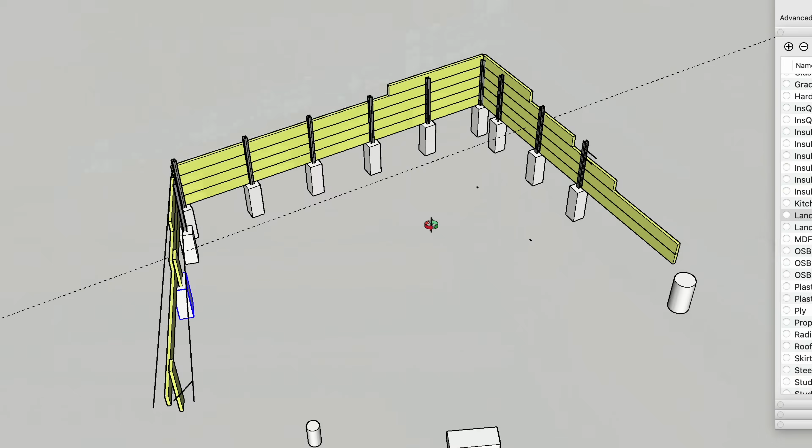What to do with this redundant, sloping, overgrown space at the top of this steep garden? How about a garden room? Or maybe a barbecue area? It's big enough to build a little mini house, or a lovely flat lawn for watching sunsets.

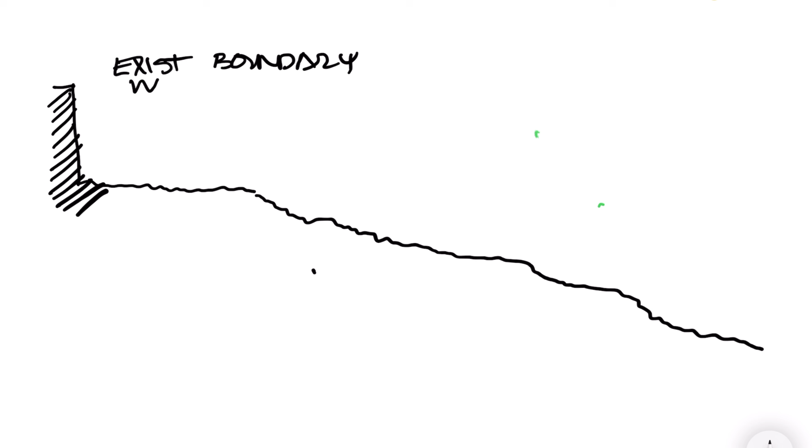Either way, we've got to make it flat somehow, and let's think about a sequence. I need to clear the space, level it, and at the same time prevent all the surrounding land slumping by building some kind of retaining wall.

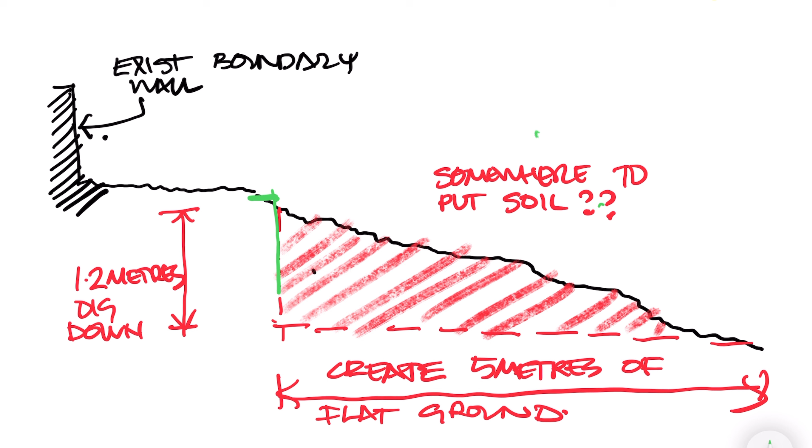It's in such an inaccessible area at the summit of this steeply sloping, overgrown and neglected land. I'm going to have to dig it out all by hand, find a place to relocate all the unwanted soils, and carry all the materials up and down the hill by hand. No mini digger for me. Access is pretty much impossible for anything other than a person.

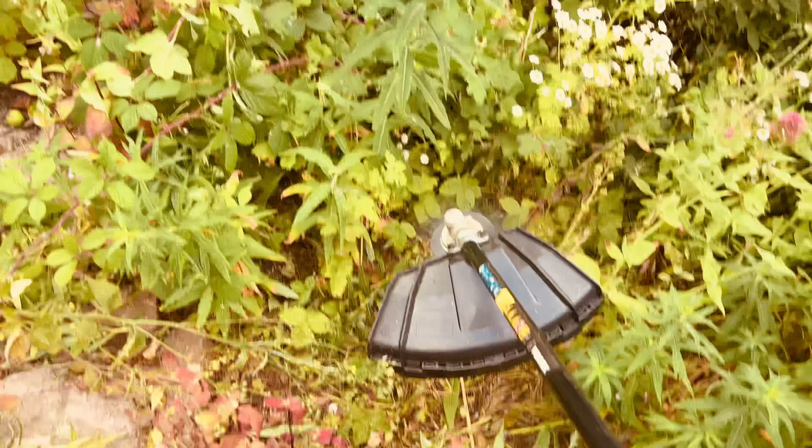For the tools I think I'll need to cut back this overgrown den and get the uglier trees and overgrown weeds away, I'll need to clear out all this bush, using a combination of this petrol rotary brush cutter and this DeWalt hedge trimmer. I'll bag the cuttings and take them for recycling in these big canvas bags, but for the really prickly stuff I'm going to use this incinerator to burn it.

Just talking to my neighbours first to make sure they're cool with that, as well as checking my local council's policy on burning organic waste in your garden.

While cutting down the trees and branches, I'll use this DeWalt mini chainsaw with a large battery, and I'll be sure to have adequate face, ear and foot protection. For my hands, I'll use these chainsaw gloves. They've saved me in the past while using these highly dangerous tools.

I tend to use the smaller battery sizes for things like impact drivers and combo drills to keep them light in my hands, but for circular saws and chainsaws, you'll need the bigger battery.

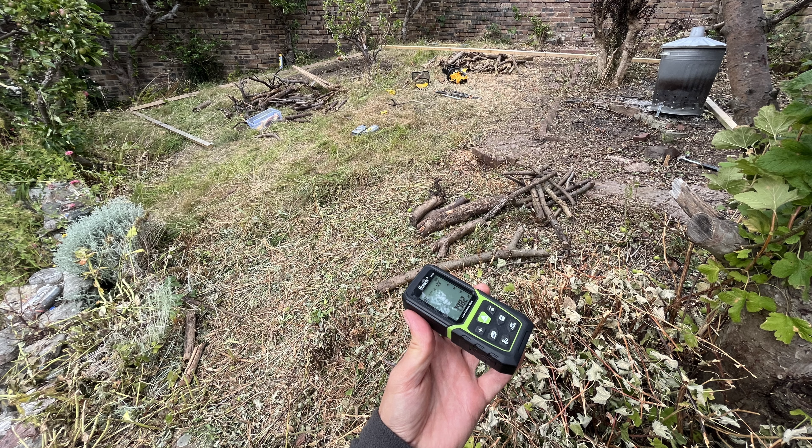Now with the land cleared, it's time to set out where I want my dig to start, which in turn will set out the position of my new retaining wall. I'll set out very approximately using these battens, lie them on the floor, and then using a combination of a tape measure, a digital measure and Google Maps, I'll get a bit more detailed a plan.

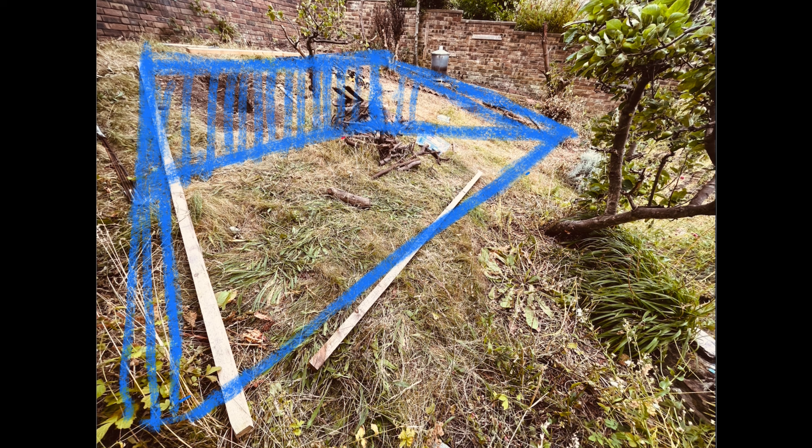I'll spray down the footprint accurately and then get a good night's sleep. I've got a week or two of serious digging ahead of me, and I'm no muscle man. I'm going to be digging down about 1.2 metres from the highest point over this footprint, which is a huge amount of fill to excavate by hand, and I need to plan what to do with all of that soil.

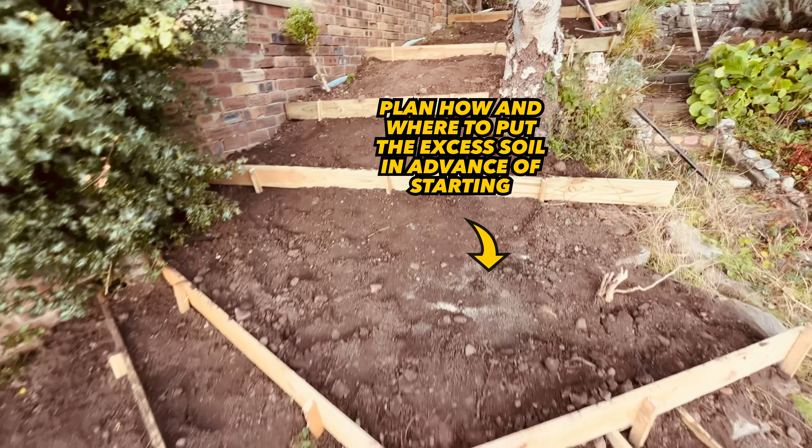I'll be creating a series of terraces with it along both sides, which I'll talk about some other time. I'll be using this simple electric mini tiller, sometimes called a cultivator. You can spend more, but really for the price and the amount of times I'll be using it, this one's fine.

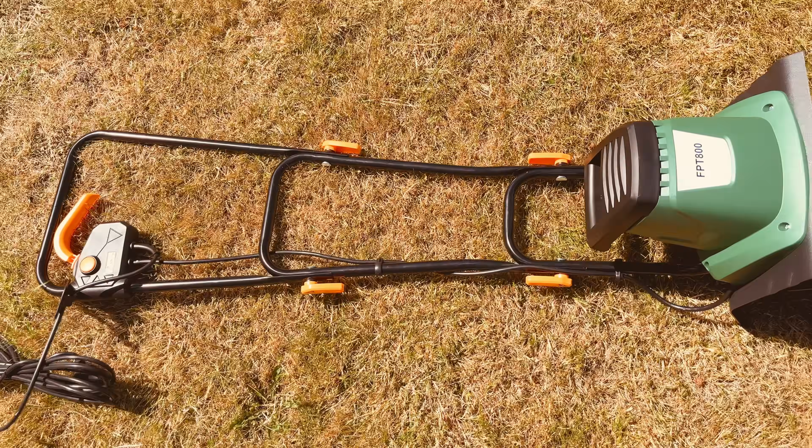And if you're building a garden room or outbuilding where you need a power supply, water or drainage in a trench, it's really good for forming the trench, as its dimensions are the perfect size for that.

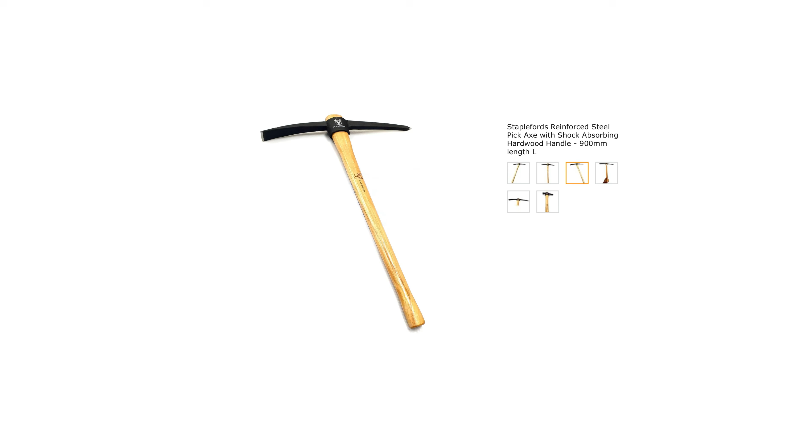I'll use this hand pick, and a bigger shovel with angled edges. I'll need a wheelbarrow - this one with a puncture-proof tyre is what I recommend - and I'll use this grafter shovel for any tree roots or boulders I need to get through or lever out.

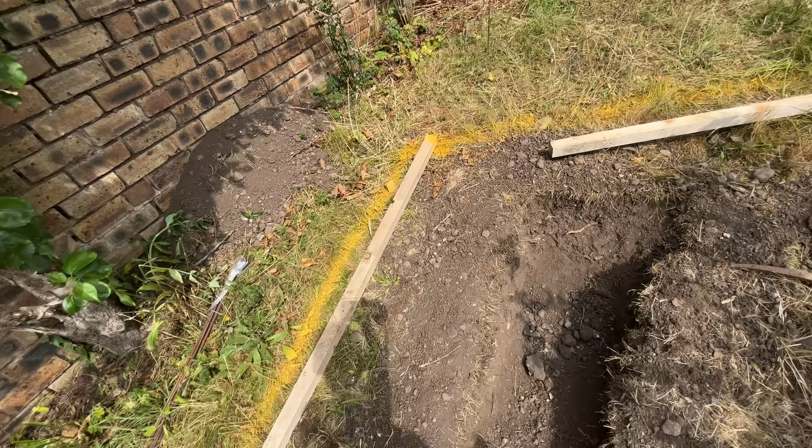Now let's get started. There's not a lot to this that I can tell you that you probably don't know already - it's really just about elbow grease and perseverance. Unfortunately, I lost a lot of the footage due to my lack of intelligence when it comes to filming time lapses, but safe to say it was pretty hard work.

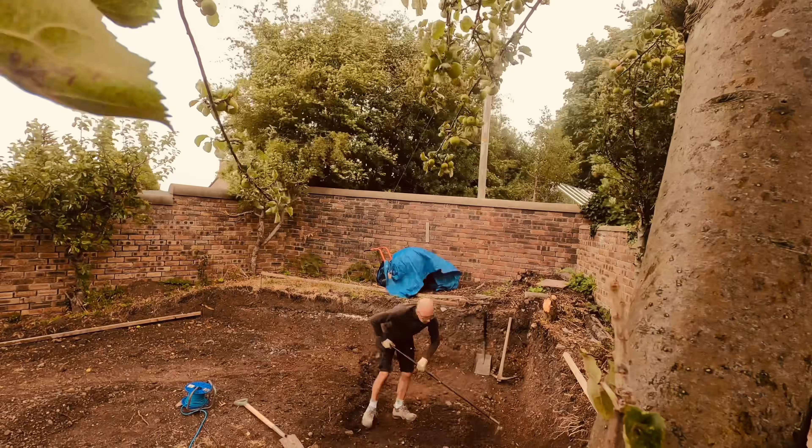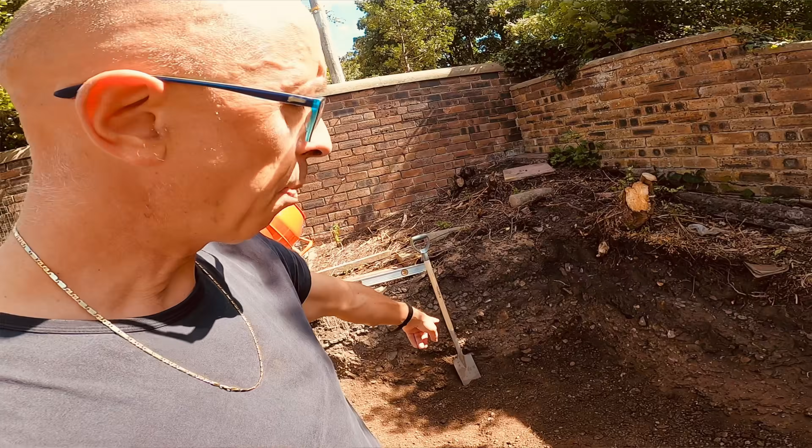8 days in total, because I did this in the middle of a very dry period. The land was totally solid, and it also had boulder clay close to the surface, so I didn't really bother with any shoring. Now where there's any doubt, you should consider some form of temporary propping if you're going as deep as I am, and there's any hint of movement.

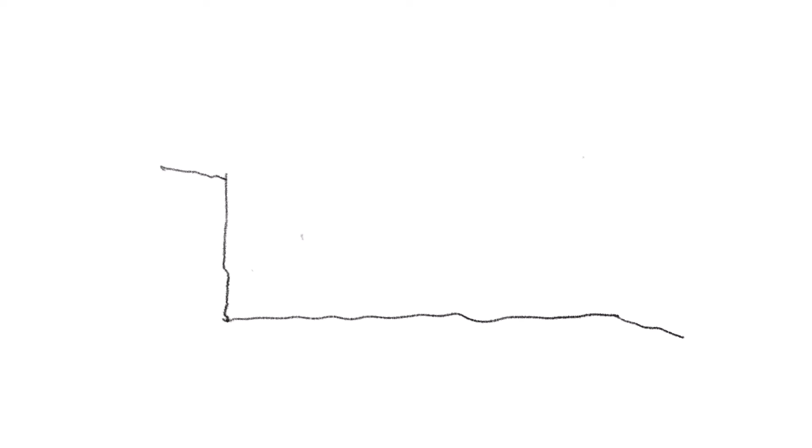I made these temporary shores for this project using 4x2s and OSB. The principle would be similar here, except you would be constructing a triangular shaped shoring with the struts, because you're only supporting one side, with the OSB obviously going against the side you're supporting.

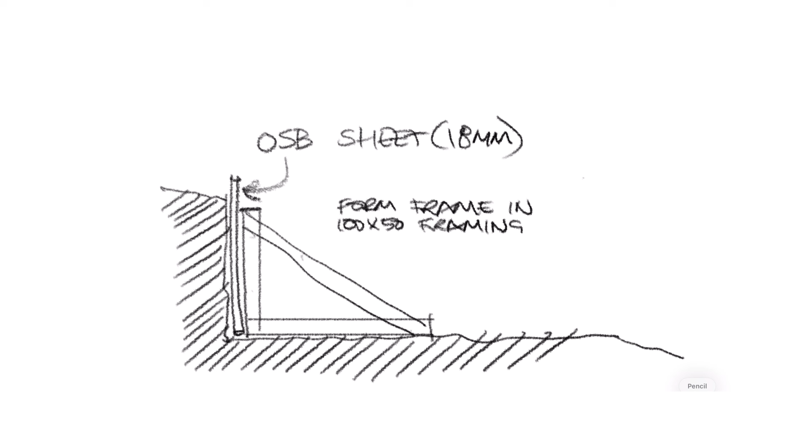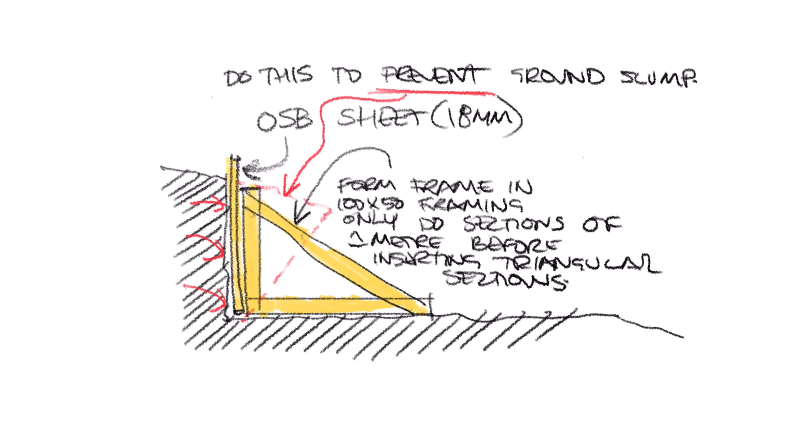I'm going down about 200 millimeters using the tiller to loosen and then the pick to break up. The deeper you get, the harder packed the soil is, so the more you use the pick and less you use the tiller.

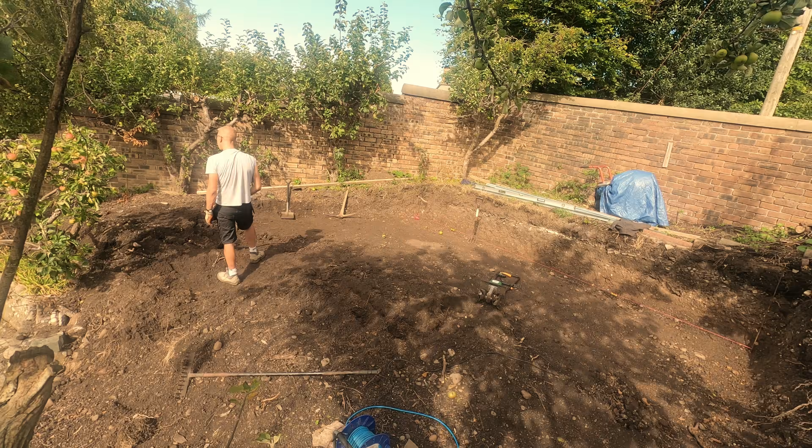To the depth I want, I'll take some basic levels using a piece of 6x2 timber, and then it's time to consider the retaining wall.

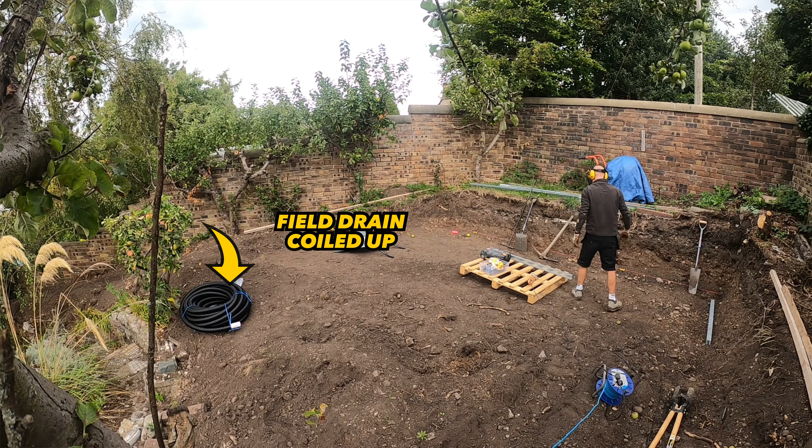Now I've dug the footprint I wanted, plus the thickness of the retaining wall, plus the thickness of the field drain, which I'll run around the upper side to relieve the pressure and divert the groundwater down the hill.

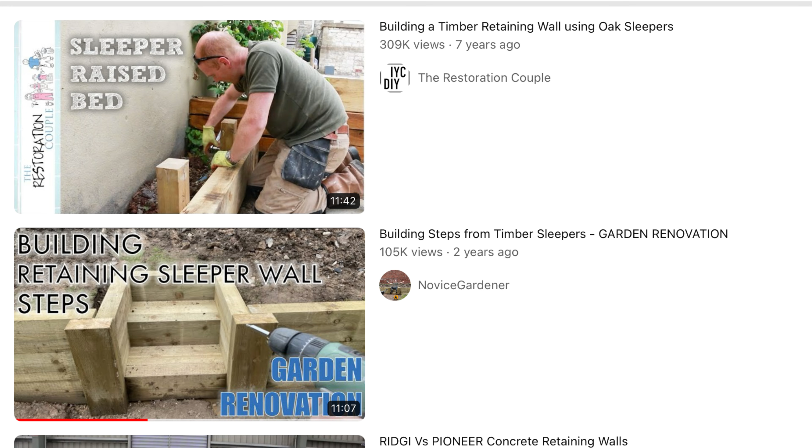Now let's talk about the design of the retaining wall. The trend at the moment seems to be railway sleepers, big chunky 200 by 100 slabs of timber. Aside from the crazy cost and weight of them, my issue is how to get them really firmly bedded into the ground to cope with the lateral thrust of all the ground these sleepers are holding back.

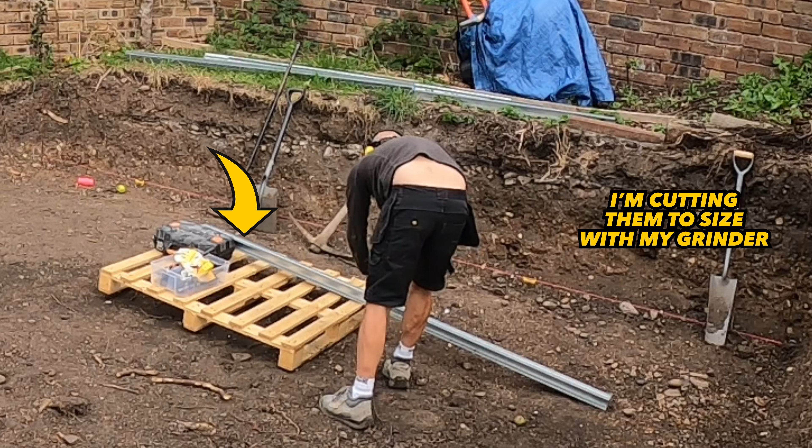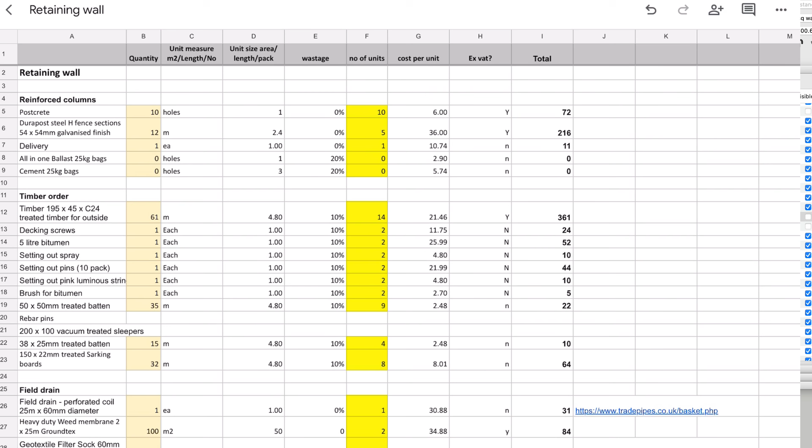My preference is to use these galvanized H sections at 1 meter centers. Super strong if you orientate the web to work at right angles to the direction of the slope. These are from a company I believe called DuraPost, and I'm going to use these to support 45 by 200 millimeter pressure treated C24 graded structural timbers.

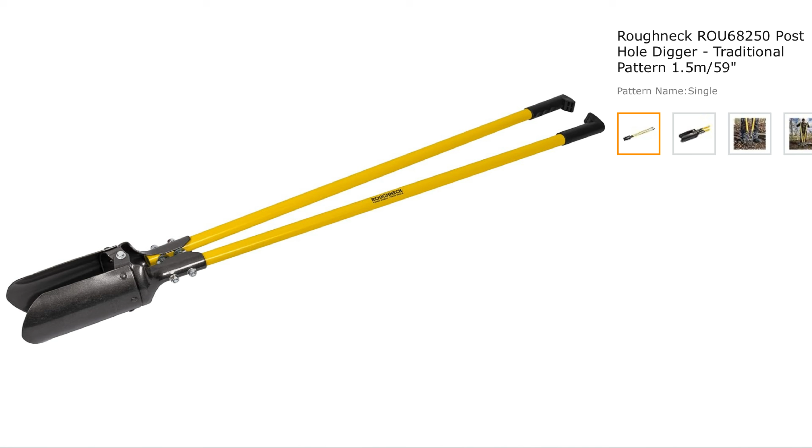I can get these posts set really rigid in concrete pockets by using a post hole digger, digging very deep into the ground and securing the posts rigid by pouring concrete into the hole.

You need to dig down about half of whatever height your post is for the depth of your hole, and that's an absolute minimum to prevent any rotation of the post as the pressure on the timber builds up. So if I'm at 1.2 meters high here, the depth of the post hole would be an absolute minimum of 600 millimeters plus about 50 millimeters cover at the base.

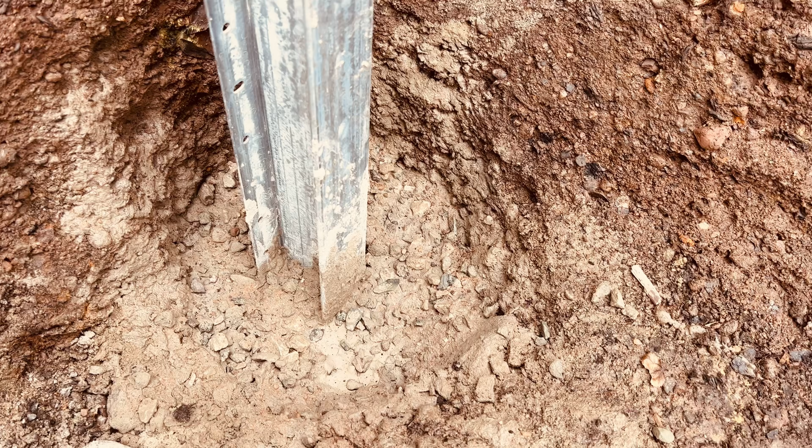For something where I'm not supporting a building, postcrete is fine, and I'll use one bag for each hole. I'll get these bags delivered on a pallet rather than lugging them by hand in the vehicle.

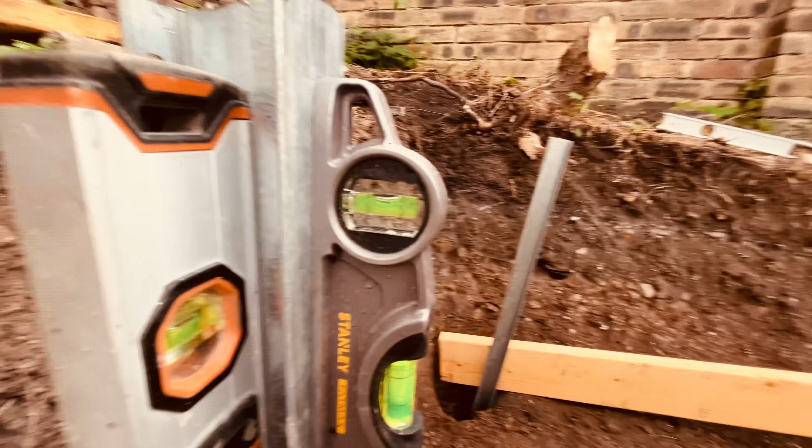Whilst one of us keeps each post as vertical as possible, the other puts in the water first, then the postcrete, damping it down with a piece of timber to get it all mixed in, and then using this little magnetic post level to level it in both directions. This is a cracking little tool and one that you'll use forever, so it's a real worthwhile investment.

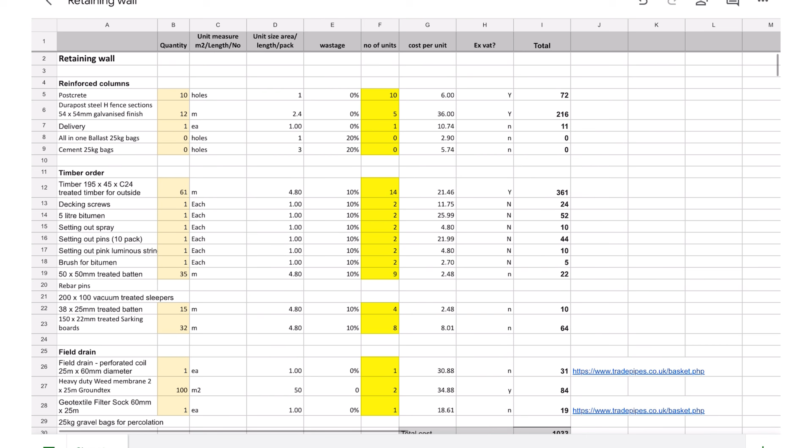Be careful with postcrete, you've just got a few minutes before it begins to set to the point where you can no longer make your adjustments.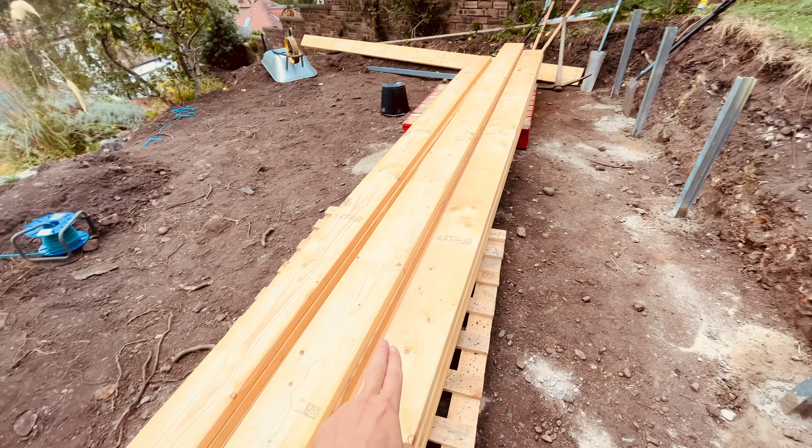I'll leave a day or two for these posts to get solid, and then I'll measure out my C24s, which have been delivered to me in 4.8 meter lengths.

Before I get them in place, and even though these have been factory treated, I'll paint the back sides and the undersides with a few coats of bitumen.

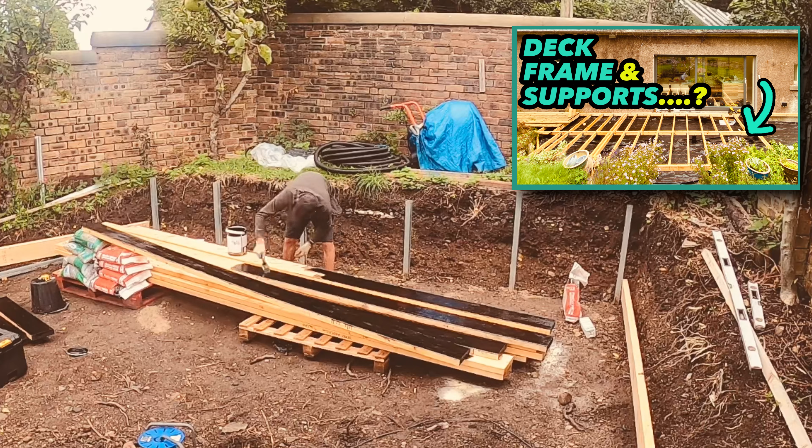This stuff can make indispensable for any and all of your outdoor work. See my video on decking, for example, for how to create a supporting frame that incorporates bitumen and will last you forever.

Then I'll put them in stretcher bond style, making sure the bottom one is spaced off the ground by about 15 millimeters and it's totally level.

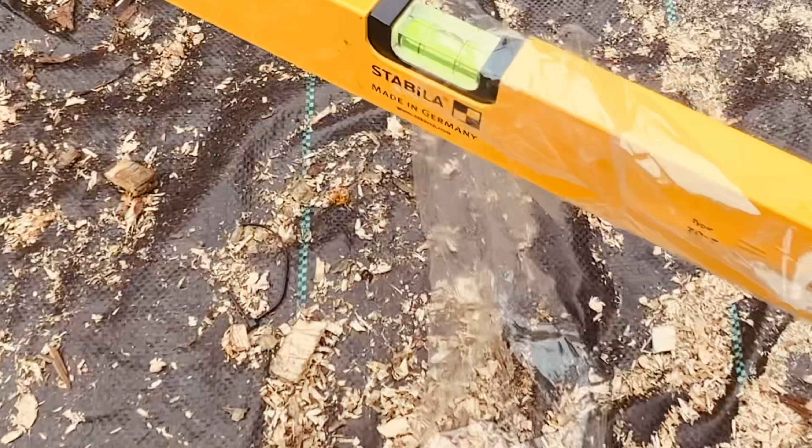I'll use this fantastic level to ensure everything is super level. The great thing about these H posts is that they have fixing holes incorporated, so I can drive decking screws through and into the timber, which will grab the timber and pull it hard up to the posts to make the whole thing work together against the land and do its job as a retaining wall.

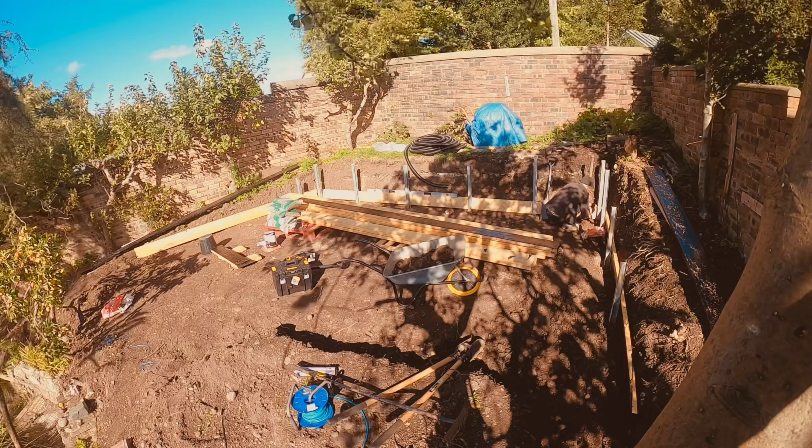I'll go around all three sides, butting up at the corners to maximise the strength, building up at the contours of the retained land.

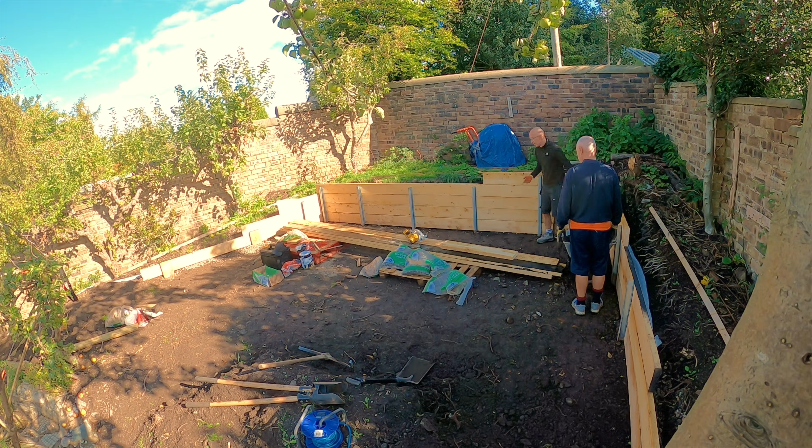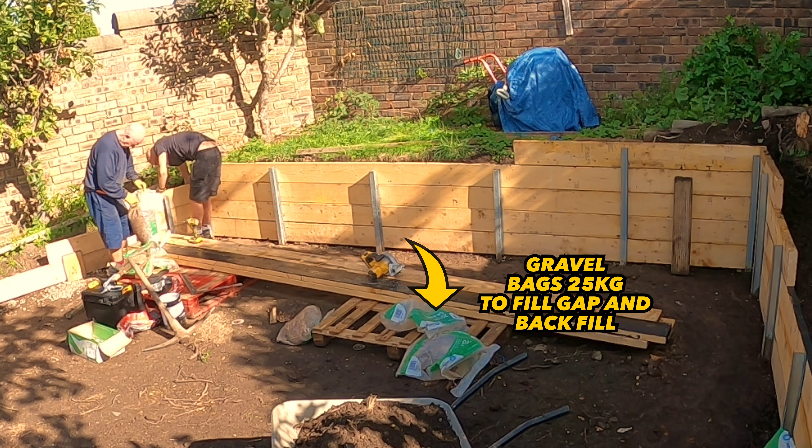Start with a backfill. Here I'm using these 25 kilogram bags of 20 millimeter stones.

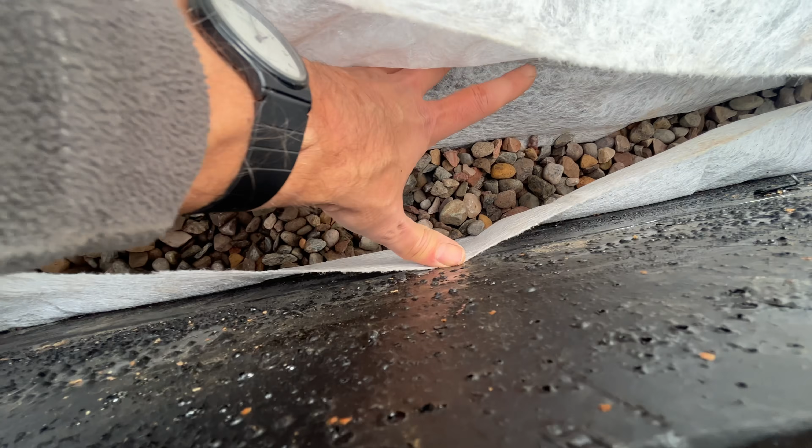Try to choose the slightly rounded ones as opposed to the sharp chippings so as to maximise air gaps, since you want the groundwater to be able to migrate as easily as possible down to where we're going to place the field drain.

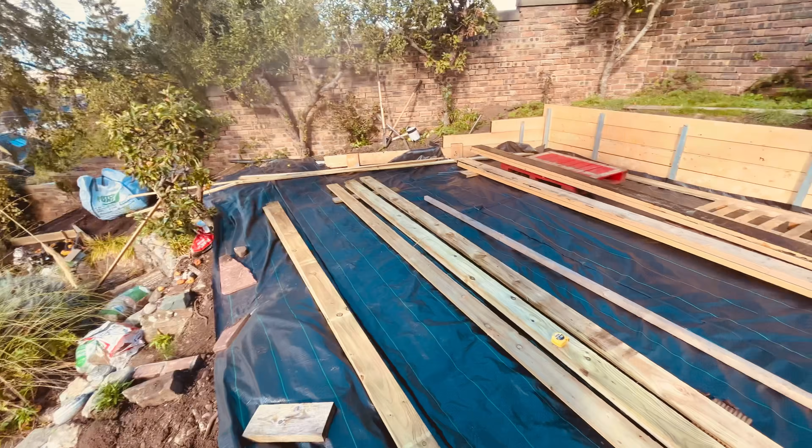But we'll save that one, all about the drainage, the fabric and the pressure, for another video.